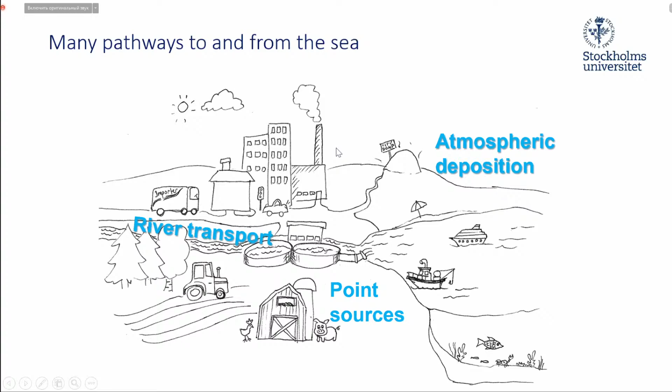And we don't actually know which chemicals make it to the sea or which pathways they come by in most cases. But we do know that wastewater treatment plants are important collection points for many diffusely emitted chemicals in our society. How this pathway compares with other transport routes can be more or less easy to determine. For most pharmaceuticals it is obviously the major transport pathway. But for other chemicals like flame retardants or plastic additives, it's more difficult to generalize, and they can take several different pathways to reach the sea.

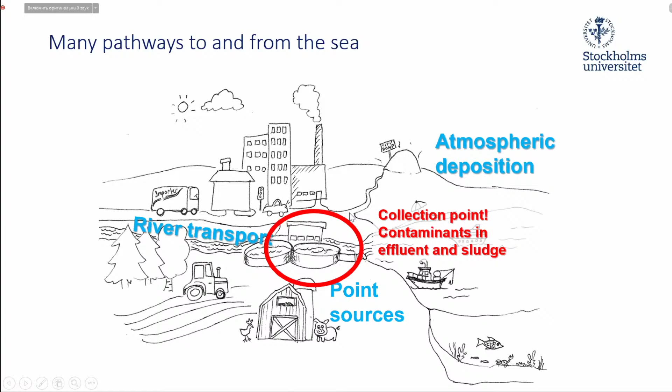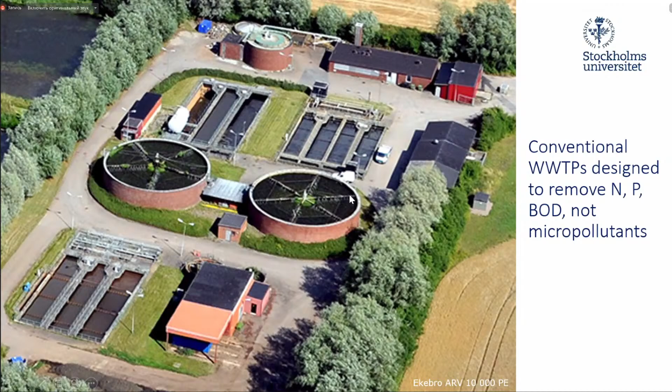But when we look in wastewater treatment plants, we do find a wide range of chemicals. Conventional wastewater treatment plants can have different setups with different treatment technologies, but they are all designed primarily to remove oxygen-consuming organic material and nutrients. Despite this, many chemical contaminants, so-called micropollutants, are removed anyway, depending on their molecular structure and the plant conditions. They can be lost via volatilization, degraded during treatment, or sorb to particles which sediment out and become the sludge. But a certain fraction passes through and is emitted via the effluents.

And just to show you some examples, this graph shows a typical removal efficiency of a range of chemicals, mainly pharmaceuticals, with removal efficiency on the y-axis, in a conventional treatment plant. This is data compiled from the scientific literature. And you can see that it's very variable how much of the chemical is removed during conventional treatment.

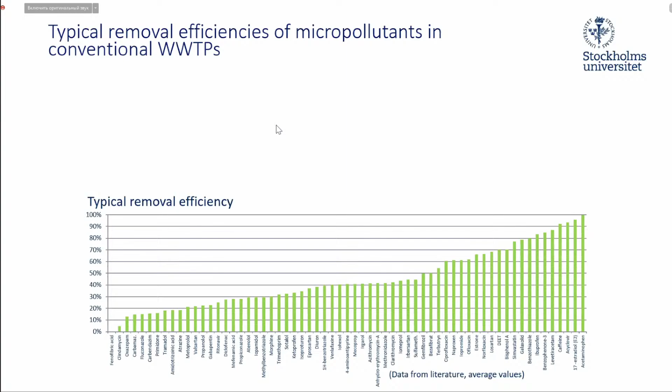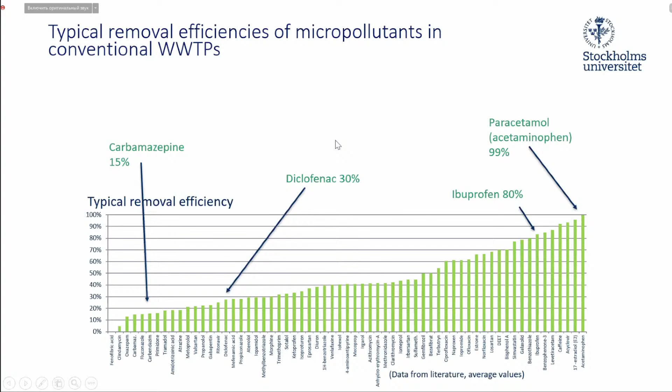I show a few examples. The pharmaceutical carbamazepine is not so well removed. Diclofenac is a common drug that is also not so well removed, whereas ibuprofen and paracetamol are quite well removed, although there is no special treatment for these pharmaceuticals. So it's very variable, and in general maybe half the load of the micropollutants is already removed in conventional treatment.

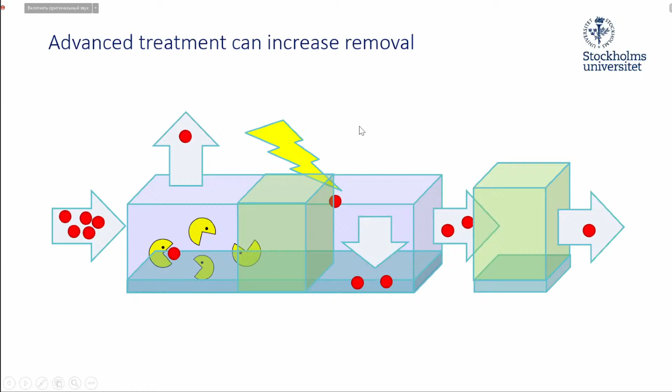But there are possibilities to improve this removal efficiency, using technologies that specifically target micropollutants, either integrated in the treatment or as an additional step after the conventional treatment. These technologies are based on different fundamental mechanisms: better filtration of the wastewater, oxidation, for example using ozone, adsorption to activated carbon, or enhanced biological degradation. There are also other techniques, but these are the ones used in full-scale applications.

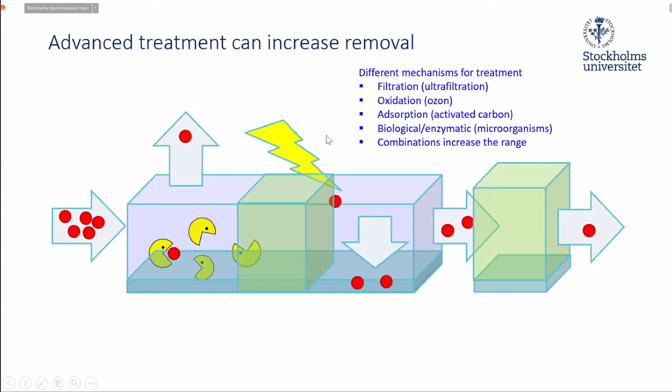But the efficiency of these technologies depends on how they are used, for example the dose of ozone or the amount of activated carbon. If we look again into the literature where these advanced technologies have been used in full-scale applications, the additional removal is often around 70 to 80% for the individual chemicals. So this kind of removal is what you often aim for when setting up the treatment.

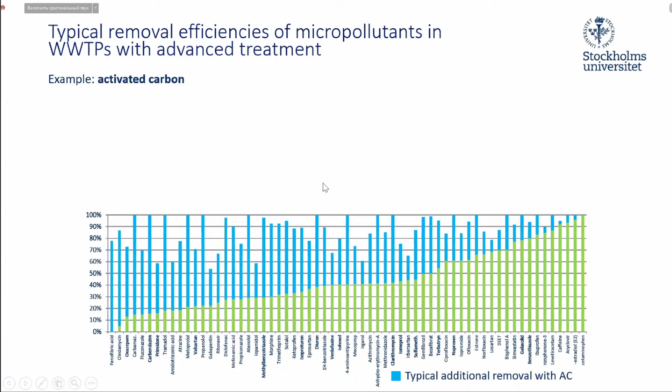And the improvement of the total removal is, of course, dependent on how well the chemical was removed in the first place. You can see there's quite a large increase in total removal for carbamazepine, and diclofenac can be removed to a large extent, whereas for ibuprofen and paracetamol the additional gain is lower because these substances were already well removed in the conventional treatment.

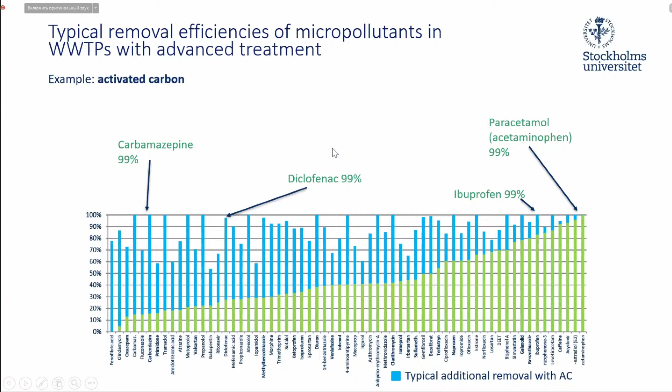Yeah, and I can also comment here that these are examples for activated carbon. And this graph would look different if it was ozonation, because, as I said, these technologies are based on different fundamental mechanisms, and the efficiency is different for different substances. Some substances are very stable and are not so susceptible to ozonation, for example. So it's often discussed that we need to have combinations of different types of advanced treatments that have different mechanisms to get a broader range in this removal.

Okay, so today there's a debate regarding the use of advanced treatment of municipal wastewater, if this is something we should invest in. And there are certainly both pros and cons with advanced treatment. So on the positive side, this is a broad measure. It doesn't target a specific compound, but the treatment will generally decrease the concentrations of micropollutants that are emitted. For some of them, it will be almost complete removal, and for others, this will not have a big influence.

It's good that it can remove both known and unknown substances that we are not aware of in the wastewater, including also transformation products of substances. So it can be viewed as a precautionary measure, maybe a safety net that can capture substances that have slipped through our regulatory net. And these technologies already exist and are implemented in quite many wastewater treatment plants, for example, in countries like Germany and Switzerland and other parts of the world. And it is believed that if this implementation gets wider, it will also help technology development and make these technologies better and less energy demanding.

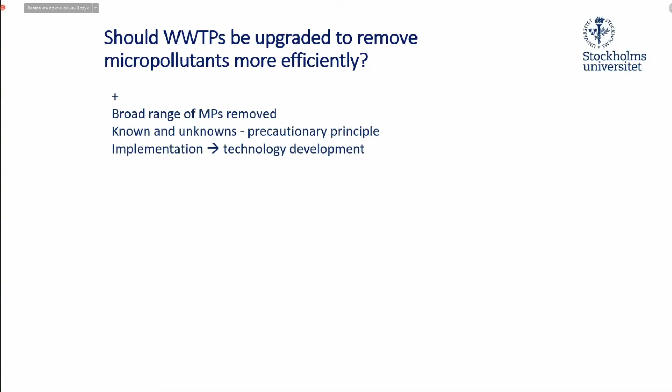Because this is, of course, the big drawback, that this costs money and energy. And who should pay for this? Should the households pay with higher prices for the water, or can we make the producers of the chemicals pay for cleaning the water from their products, following the polluter pays principle? Another argument that is used against this is that not all micropollutants can be removed anyway. We cannot rely exclusively on this measure. And if we use ozone, we will actually form other transformation products, as it's not always full mineralization in this process.

And this is not viewed as a sustainable measure, as it's a fundamental principle that pollution should be stopped at the source. And the wastewater treatment plants are not sources of these pollutants. They are merely transport pathways. In this debate, it's also stated that it's not clear that this is really needed. It's not proven that, for example, wildlife populations are negatively impacted by wastewater. We cannot see effects at population level. And so this means that it's unknown what the true benefit would be of this measure. This is a problem when you have measures that are implemented out of precaution, that you don't know what you really gain in the end.

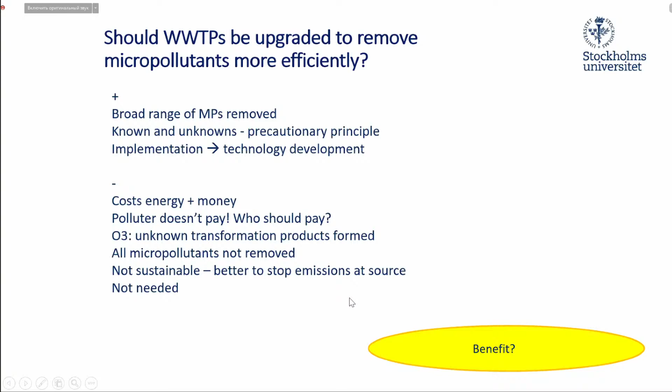But so let's have a look at the Baltic Sea then. What is the problem here? Well, there are certainly studies that show that observed levels of micropollutants in European river water are likely to cause both acute and chronic effects on aquatic organisms. But in the Baltic Sea, we have a high dilution. So levels of most substances are lower, but we can see that there are elevated levels in many coastal waters. And this is partly due to the continuous emissions from wastewater treatment plants and river water.

And we can see that there are gradients with highest levels close to urban areas, for example, in the Stockholm archipelago. But some micropollutants are also detected in the open sea water, which indicates that they are persistent enough to build up in the entire Baltic Sea. And it is mainly pharmaceuticals that have been measured in the water phase, but also other polar organic micropollutants like corrosion inhibitors, pesticides, flame retardants and a wide range of chemicals. I show here some data from two different studies, and you can see that the median levels are often below 100 nanograms per liter, but occasionally much higher concentrations, in particular in the coastal zones.

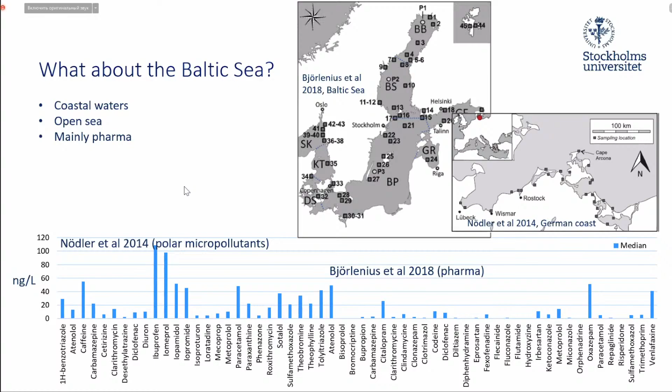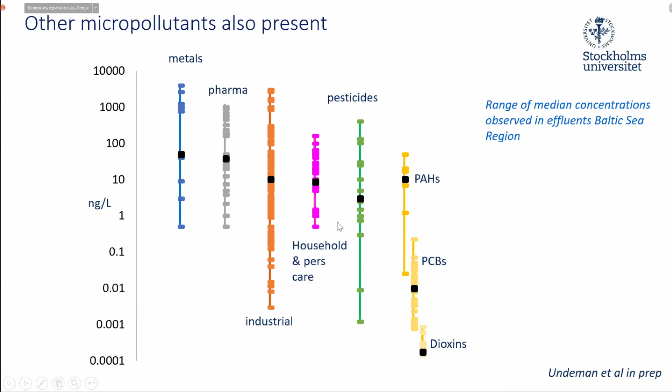This is a logarithmic scale in nanograms per liter on the y-axis. But we can see that many industrial chemicals and other types of chemicals are present in as high levels in the wastewater. So we can suspect that a wide range of other substances than pharmaceuticals are present in our coastal waters.

But are these levels too high? I mean, the mere presence of chemicals in wastewater and in the Baltic Sea is perhaps not an argument to invest in expensive treatment technologies, because we are, after all, able to detect lower and lower levels of more and more chemicals because of the development of analytical methods. And unfortunately, it is extremely difficult to judge if the chemical mixture emitted from wastewater treatment plants is a large threat compared to other chemical inputs.

We can see that levels of many individual substances, when we look for them, are often exceeding this predicted no effect concentration, for example, at river mouths and in coastal waters. But looking at the combined toxicity is perhaps more relevant, and this is now a big research area. You can look at this example, a study from Sweden, where researchers were looking at 172 known river and wastewater treatment contaminants. They were looking for these also in coastal water and found 62 of them in the coastal waters. And they then calculated their combined toxicity.

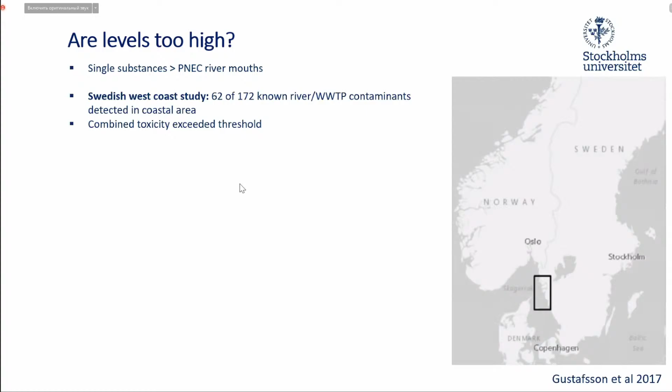But they could also see that of these 62 substances, it was actually just a few of them that were responsible for the major part of this combined toxicity. But on the other hand, it was not always the same substances in the different locations. So this is really a difficult task to judge how this combined toxicity is impacting the sea. And when you do these kinds of assessments, it's hard to say what kind of consequences you will have at population level in the different species, and it's hard to compare this to other stressors in this area.

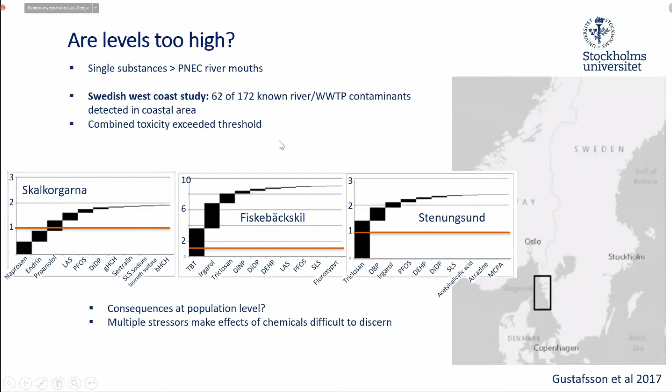But when considering better treatment of wastewater, it is also important to clarify what the goal is, because it's often argued that it is not reasonable to put requirements on all wastewater treatment plants to implement this kind of treatment, because it's particularly expensive to do this at smaller wastewater treatment plants, and it requires competence and capacity to operate these advanced treatments. So which plants should be upgraded? And this depends on what the goal is.

If the goal is to reduce the total load of chemicals, which is relevant mainly perhaps for persistent substances that can travel in the catchment and will build up in the Baltic Sea, then the best idea is to go for the larger wastewater treatment plants, because they are responsible for the largest load of chemicals in general.

But if you want to reduce locally elevated concentrations downstream of wastewater treatment plants, here you can have high levels because of continuous emissions of substances that may not be particularly persistent. It's called pseudo-persistence, that you have high levels, although the chemicals are in fact degraded quite quickly. And here you have to consider the size of the wastewater treatment plant, but also the dilution in the water that receives the wastewater.

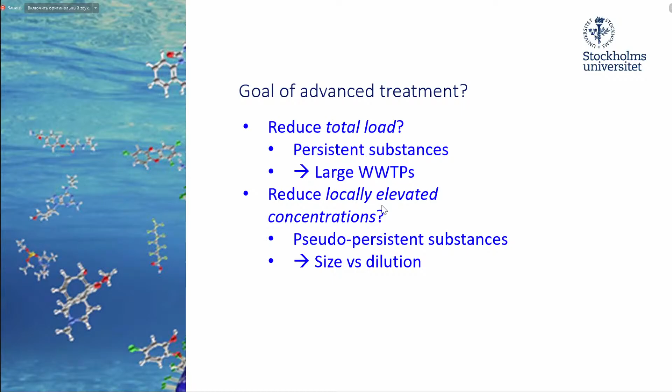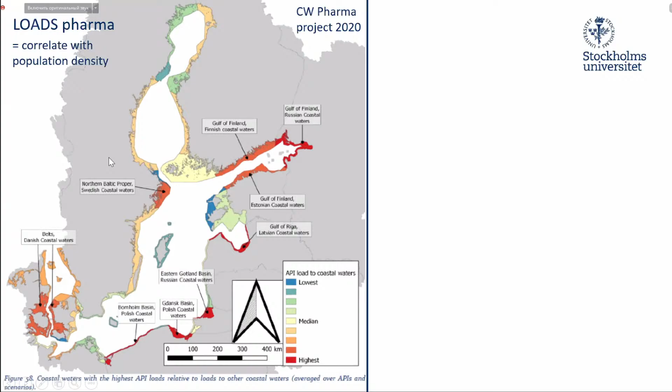So I will show here an example from the CW Pharma project that was recently finalized, a Finnish project where they have calculated the loads of pharmaceuticals in different coastal areas. And they also calculated concentrations in river water entering the Baltic Sea. And you can see that the loads of pharmaceuticals are correlated with population density. And concentrations correlate more with dilution in the river water.

So if you look here, for example, at the German coast, the green colors indicate that you have a little bit lower loads here. It's probably not a large population, but because of a low dilution, small volumes of river water, you actually have quite high concentrations in this river water entering the coastal area. On the other hand, if we look here at the Gulf of Finland, they're predicted to be rather high loads, for example, because of the large population in St. Petersburg.

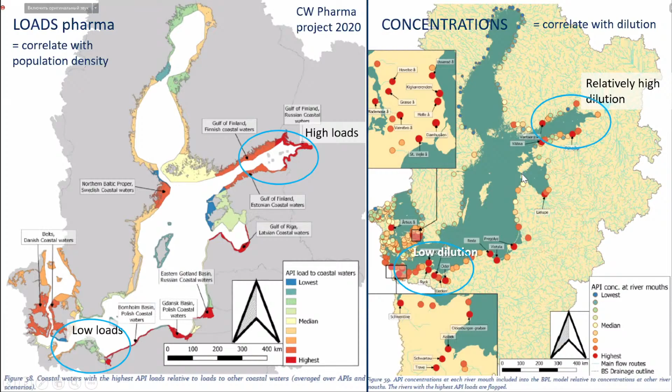But in many of these rivers, you have also a high water flow, so you don't have so high concentrations. So you have to separate if you want to reduce the loads or reduce the concentrations in the coastal water. These are two different goals.

So to sum up, the question here of if we should use advanced treatment, it's not so easy to answer, but considering the knowledge we have today, I think the strongest argument, as I see it, is that this is a precautionary measure that can be used both to reduce the amount of relatively persistent and mobile substances that can travel in the catchment, but also to protect coastal zones with elevated concentrations due to these continuous emissions.

But you have to consider what you want to achieve when you decide which wastewater treatment plants to implement this in. And I think we should take advantage of developments in analytical chemistry, like non-target analysis and ecotoxicology, and try to better understand how the coastal areas are in fact impacted by micropollutants, how large a fraction of the chemical load has passed through wastewater treatment plants, and what fraction of the negative effects actually originate from wastewater treatment plants. These are really tricky questions.

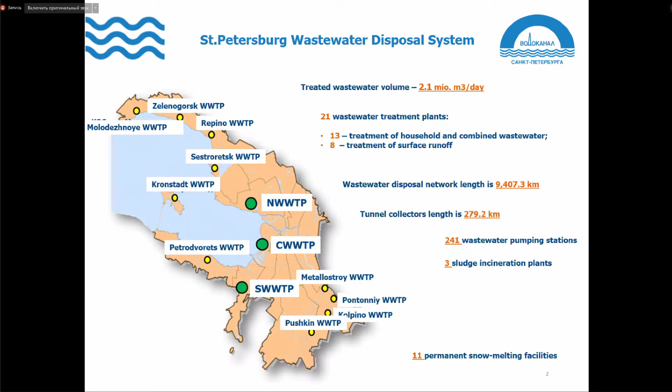In my presentation, I will tell which measures Vodokanal takes to reduce the pollutants that pass into the water bodies of the city. St. Petersburg is the largest metropolis of Russia in the north that sits in the catchment area of the Baltic Sea. Today, more than 2.1 million cubic meters of wastewater is discharged into the sea. We have 21 wastewater treatment plants functioning in the city. 13 of them are aimed at treating household and combined wastewater.

8 wastewater treatment plants are there to process surface runoffs. The sewage system of our city is built in such a way that the major area, more than 70%, works as a combined wastewater disposal system, meaning that all the runoffs that the city produces go into one single disposal system: the rainwater, the industrial wastewater, the household wastewater. And 30% of the territory, meaning the new districts and the embankment areas of the city, has a separate system where the surface runoff is collected separately from household and industrial wastewaters.

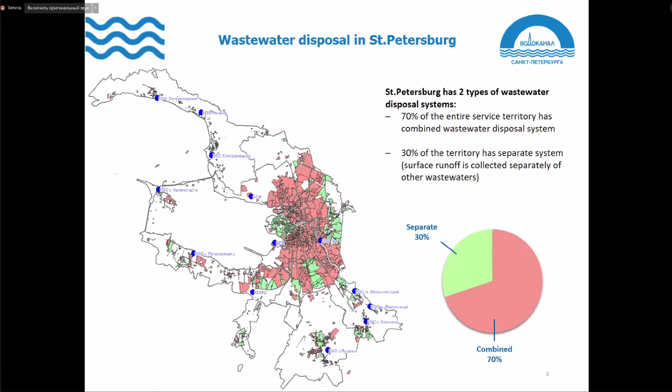St. Petersburg sits on the Baltic Sea. That's why, treating our waters, we have to abide by the HELCOM recommendations that Russia has subscribed to in 1998. And since then, everything we do has to abide by HELCOM, the Helsinki Convention. One of the major things we do throughout all those years is we deliver on our program to stop untreated wastewater discharge in St. Petersburg. Until 1978, all of the wastewater in the city was discharged directly into the water bodies, including the Neva River, which is the main source of drinking water for the city.

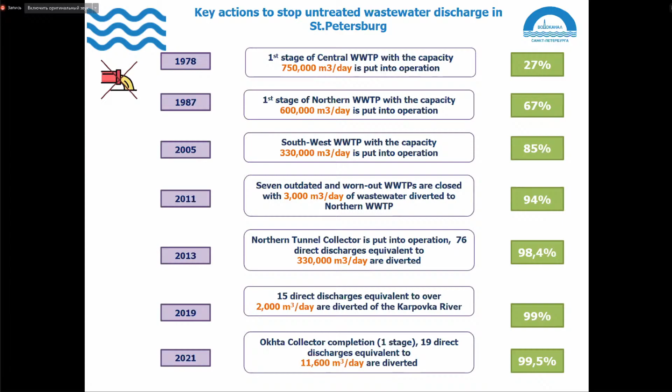This slide contains some of the key milestones that helped us by 2021 to record the level of treatment equaling 99.5%. The quality of treatment itself at our facilities is regulated by the existing applicable Russian legislation as well as by international HELCOM recommendations.

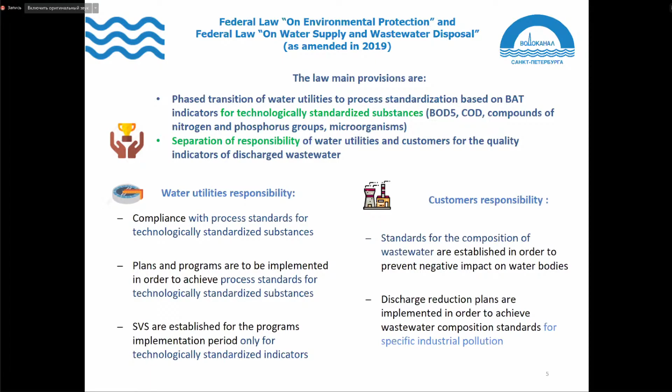Talking about the Russian legislation, starting from 2019, a new law has been passed which separates the responsibility and the obligations for the pollutants discharged between Vodokanal and our subscribers or customers. Vodokanal is currently responsible for some of the pollutants, meaning BOD5, COD, compounds of the nitrogen and phosphorus groups, and microorganisms. And the technological solutions that we implement at our wastewater facilities are mainly aimed at increasing the efficiency of treating these pollutants. Our subscribers or customers are currently responsible for their specific pollutants, which are characteristic for their plants and production sites.

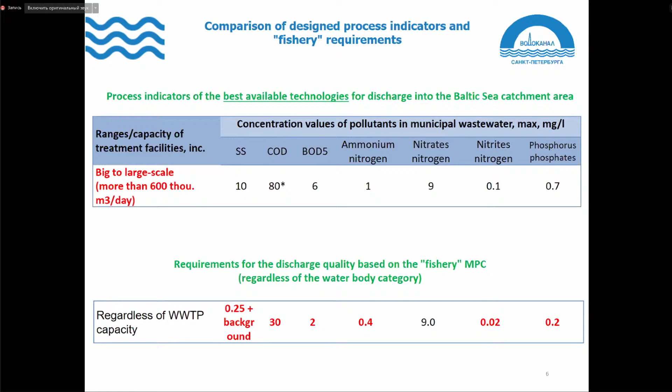So the requirements are less harsh, because previously all the wastewater treatment plants had to deliver on the level used for fishery quality of water. But having this BAT approach helps us to propose more efficient measures of treatment. Still, I need to mention that every time we perfect our treatment processes, we aim at such levels of pollutants that are characteristic for fisheries. But of course, we are relieving some of the wastewater treatment plants of unnecessary treatment operations.

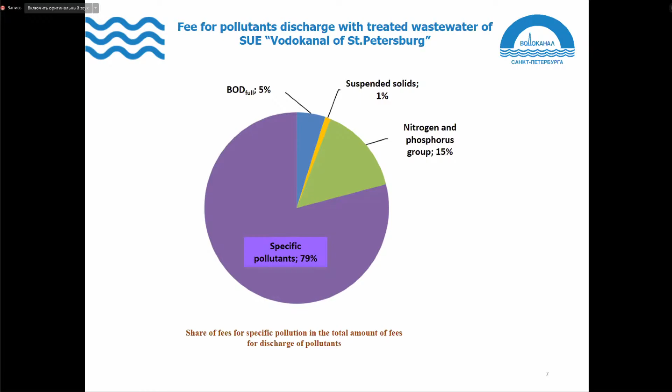Let's have a look at the share of fees. 80% of the fees that we collect are for specific pollutants. The fees that we are paying for other kinds of chemicals and substances are much lower because that's exactly what we're doing to reduce those chemicals in the discharges.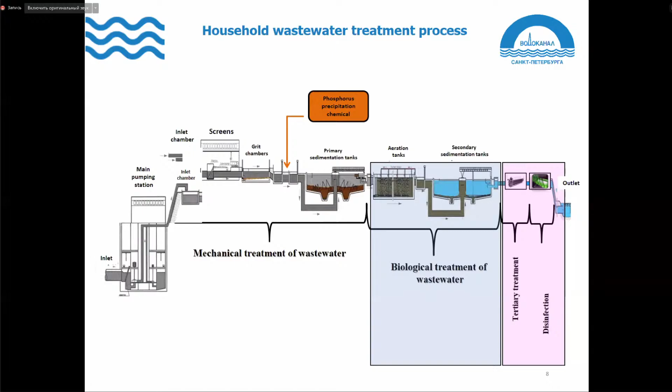Let me quickly go through the treatment system we've got. I think we can divide it into several blocks. The first block, a big one, is mechanical treatment, which has screens, grit chambers, sedimentation tanks. Next, we have biological treatment, aeration tanks, and sedimentation tanks. And in pink, I'm also showing two other blocks that have been introduced recently. We don't have them on all of our wastewater treatment plants yet. This is what we call tertiary treatment and disinfection.

Let me explain to you how the biological treatment works. That's the main element of our process today. And we pay a lot of attention to keeping it up to date, because it's thanks to biology that we can achieve the necessary quality of our waters. Biogenic elements are the main things dictated by HELCOM.

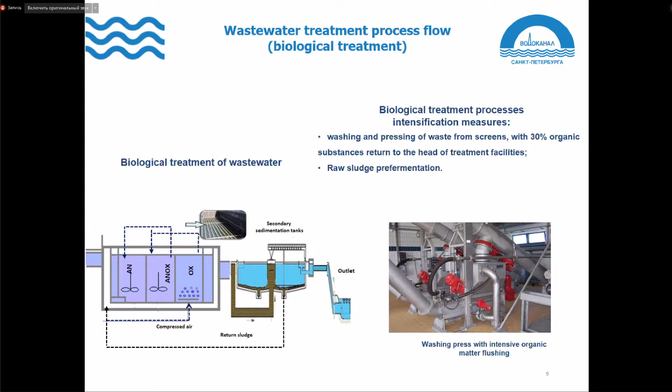I said that we have a combined discharge in about 70% of the city. And of course, our runoffs are not very rich in organics because they're diluted by surface runoffs, by rainwater. That's why what we're introducing right now is washing and pressing of waste from screens. It helps us to recuperate some of the organic materials and substances. We also use pre-fermentation of raw sludge. Let me explain which biological treatment systems are working at our plants. The first one we introduced is a Russian technology called Kreal.

This technology provided that the aeration tank will be divided into different zones with different oxygen regimes. But during the operations, during the performance of this tank, we found out a couple of disadvantages. The thing is that we were doing bubbling with coarse bubble aeration. And of course, at lower temperatures, what we can see is the dissolution of this air. That's why those zones are not that efficient.

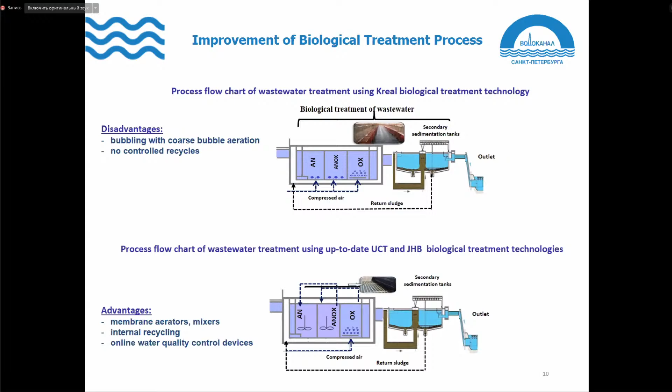Today, what we're trying to do step by step is to use the Cape Town and Johannesburg University technologies because they provide for mixers in anaerobic zones which do not let air go in. And we can also manage the system in a more flexible way, and we can do a much deeper treatment. But even though all of those things are being done at our wastewater treatment plants,

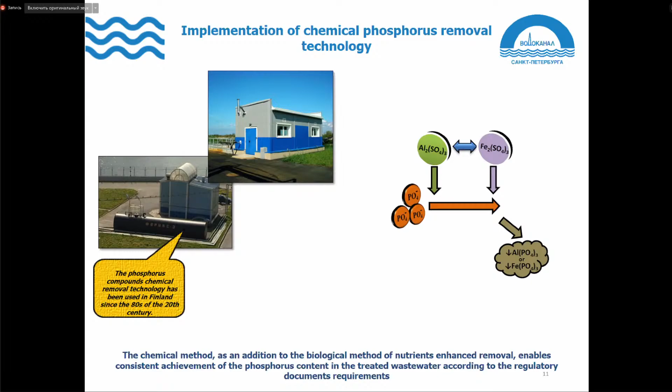we sometimes need to apply additional measures, and those additional measures require chemical methods of removing phosphorus or phosphates. The introduction of new chemical agents helps us to catch phosphates from the system by dosing the special removal agent, and in doing so, we're reducing the phosphorus load to our main treatment facilities. And in this way, we're stably cleaning our discharge from biogenes.

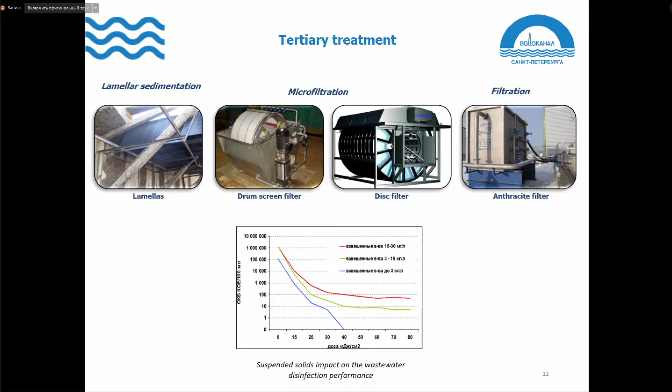In the future, we're also planning to implement some of the tertiary treatments. Today, we're testing a couple of technologies that are currently available in the market. You can have a look at them here on the screen, and we understand that tertiary treatment processes help us to reduce a lot of pollutants, especially in the solid phase in the cleaned water. And like you can see on the graph below, the lower suspended solids you have in the wastewater, the more efficient is the disinfection process.

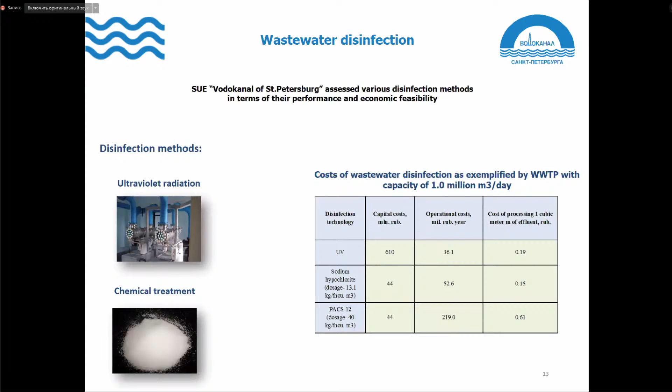The disinfection process has been introduced at about 20% of all of our treated waters. Usually we use ultraviolet radiation for disinfection, but we're searching for alternative means of disinfection. We've tested a whole range of different chemical treatments, like PACS-12, for example. Considering all the OPEX and CAPEX that needs to be invested, considering various secondary transformations, we think that still what's preferable is the UV disinfection.

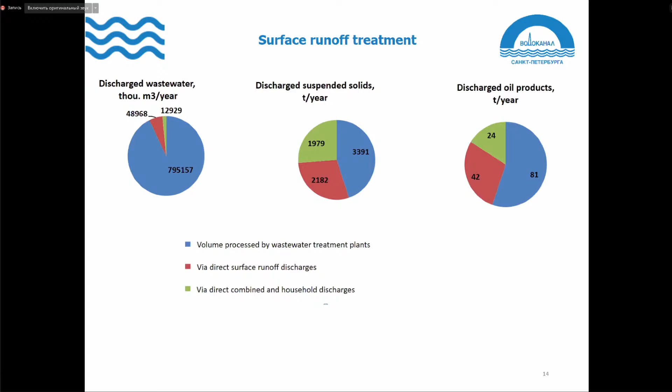What's next for the plant, for Vodokanal? All of the household, municipal and industrial wastes will be treated. Let me remind you that we still have 1.5% to deal with. We will definitely put all of our efforts on cleaning the surface runoffs, because only 30% is collected separately. We did some work with the Russian Academy of Science, and we found out that 30% of all the suspended solids that get into our sewage systems are actually collected from the surface runoffs. That's why today we need to test and analyze and find the most optimal solution to clean the surface runoff, the rainwater, etc.

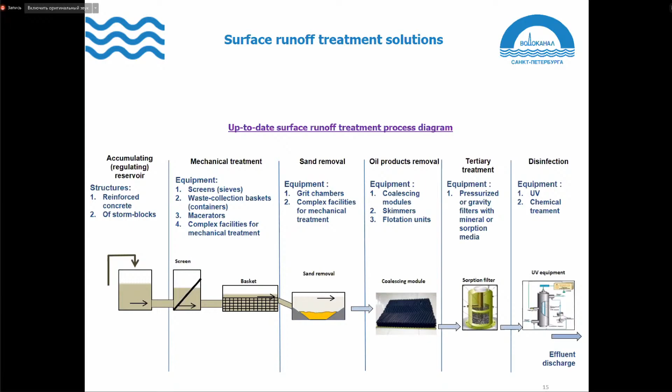The major system that we need to use here is, of course, mechanical. Various accumulating reservoirs, mechanical treatments, sand removal, oil product removal processes, shale shakers, sieves, grates, and so on. We're testing a lot of solutions at the moment to find out the best. Of course, to achieve the necessary effect, we need to remove the sludge from the surface runoff.

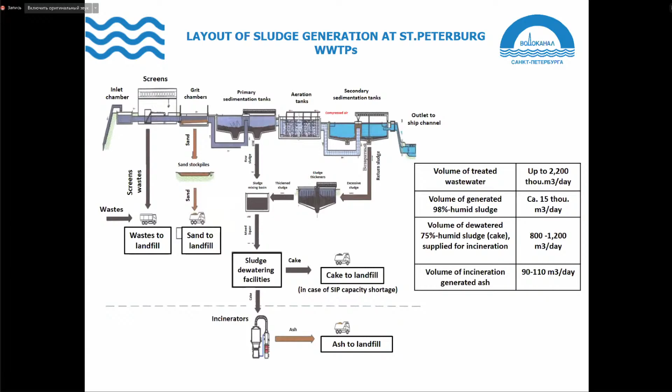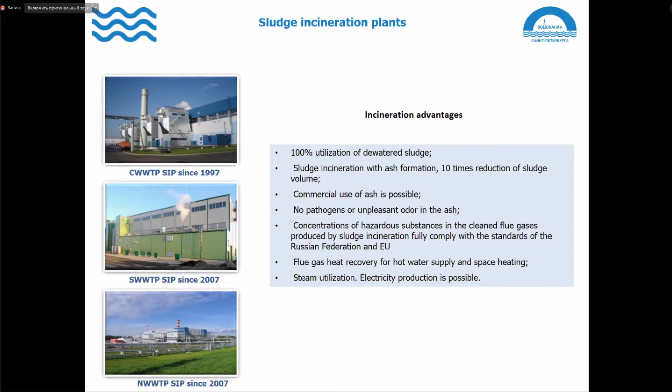All of the sludge that we get at our wastewater treatment is dehydrated, and we bring it to 3 incineration plants, which we have in our city. The sludge incineration plants helped us to reduce the amount of sludge by 10 times, and we get the ash, the cinder, that doesn't have any pathogenic microflora, doesn't smell, and by doing so, we don't have to dump it around the city. So we only have 2 dumps for the sludge here in the city. Everything else is being burnt.

Here's a gas treatment plant that we have at our facilities. This gas treatment facility is fully compliant with the EU regulations and Russian norms and regulations that, mind you, are sometimes even more strict than the European ones.

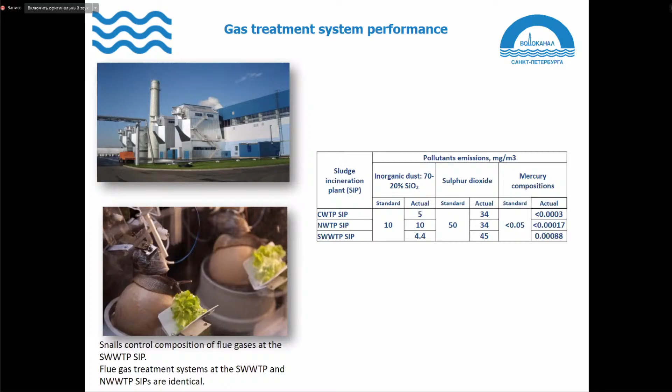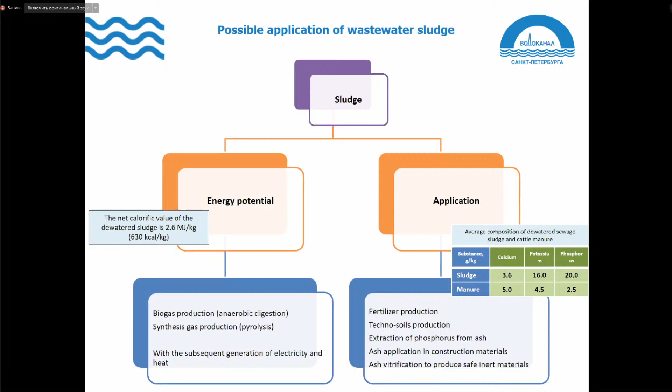Now, when it comes to sludge processing, we want to use it as much as possible to recuperate and recycle it. We remove a lot of phosphorus, so the sludge is enriched with a whole number of minerals that can be quite useful for fertilization of soil. And that's what we want to do. We want our wastewater treatment plant to be completely waste-free, basically aiming at a circular economy in wastewater treatment plants.

One of the activities that help us to reduce the load onto our wastewater treatment facilities is the introduction of snow melting machines. Previously, when the snow melted, a lot of stuff was getting into our wastewater treatment plants.

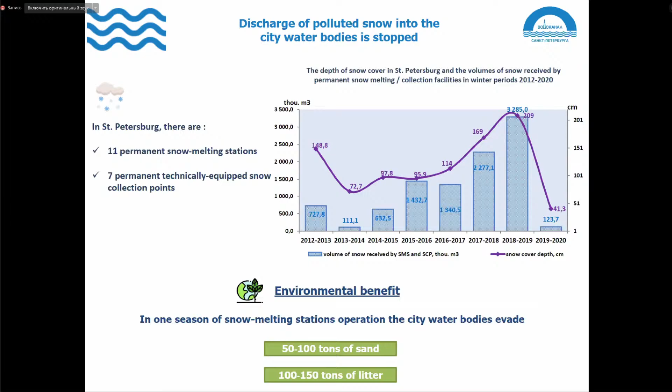Now, the snow melting facilities are being used, and that's why we don't get a lot of sand and waste on our WWTPs. But of course, the new time dictates the new solutions and of course puts up new challenges. Microplastics is a scourge of today.

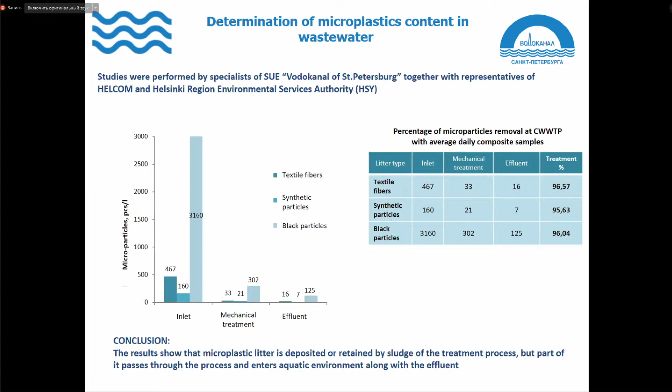Together with the HELCOM committee and Helsinki Environmental Service, we did a pilot, we measured microplastics inputs and outputs. And we found out that all microplastics can be removed using current methods by almost 96%, just the current methods. But of course, this is not enough. Definitely, that's why additional treatment measures will be required, and we hope to improve the removal effect.

And this is everything I get to say about what we do to reduce the load on our water facilities. Thank you so much.

Thank you so much, Olga. Very interesting and very impressive journey you've done through these last years in getting the wastewater cleaner and cleaner. And as I understand it, the tertiary step is the step getting you closer to maybe what Emma was talking about, and you mentioned at the end, the advanced wastewater treatment, addressing hazardous substances. Yes, what are your bottlenecks? What would you need to see to take this next step?